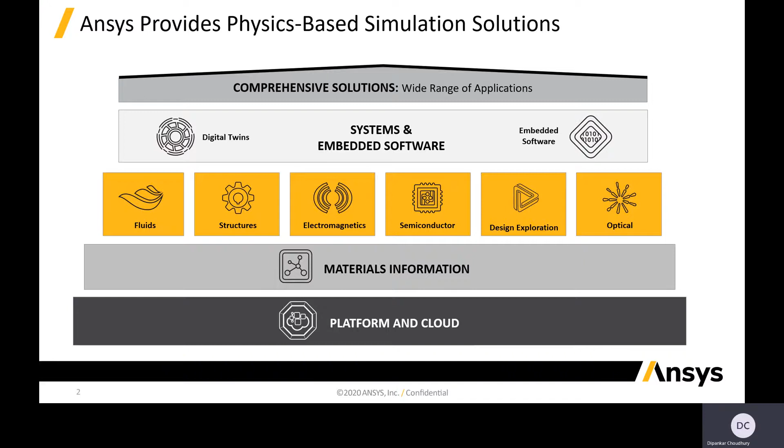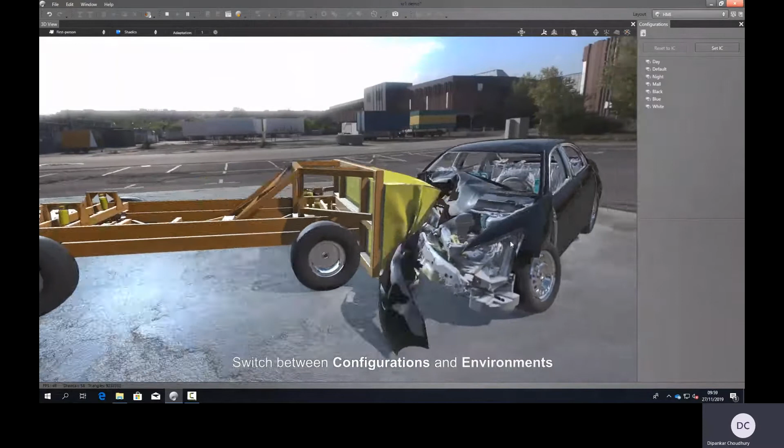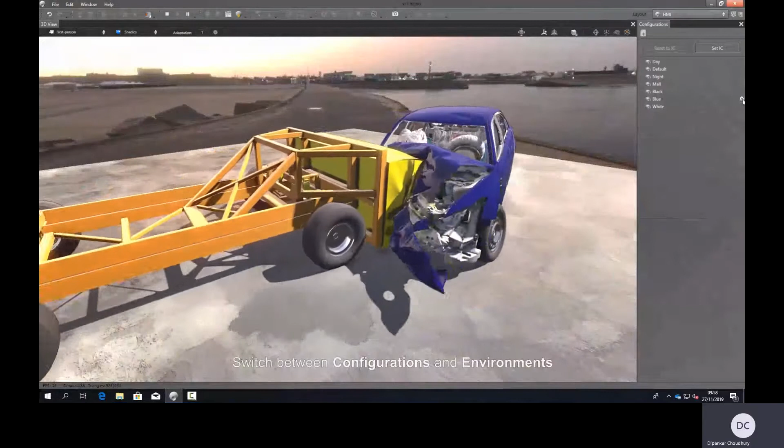An example could be seen by looking at this multiphysics simulation encompassing structural analysis, in this case impact analysis with LS-DYNA, which is a leading Ansys product for doing this type of simulation, coupled with Optis, which is optical physics modeling software that models the physics of light in a completely accurate manner, including material properties, effects of lighting, reflection, shadows, and everything. This is not just rendering from an aesthetics perspective, but physically accurate lighting calculations going on simultaneously while doing the crash analysis. This type of extremely compute-intensive calculation is not unknown to take days of computation, even on very large-scale machines.

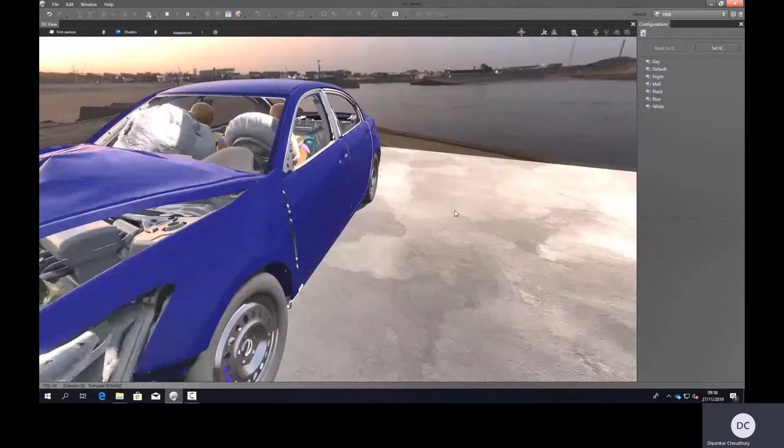So with exascale computing, we expect that these very detailed, very large-scale model sizes, and very difficult multidisciplinary physics calculations will become accessible to our customers in turnaround times that are much more useful than today.

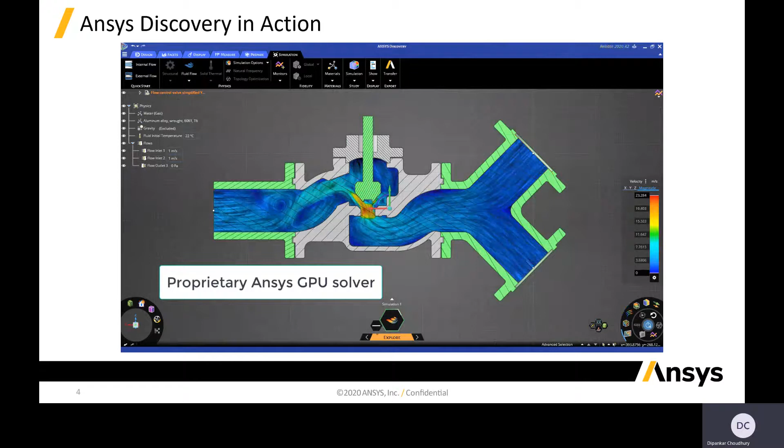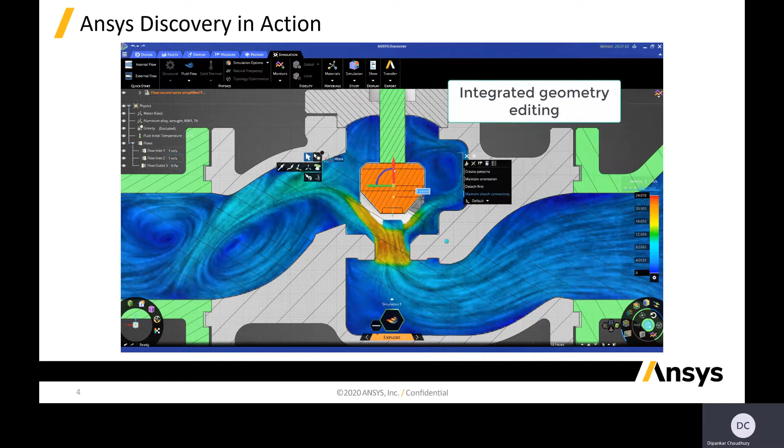The second area is for everyday designing engineers. Here we look at a completely different application called Ansys Discovery, which utilizes GPU computing in a very native manner, start to finish, from graphics, geometry building, to the calculation process and post-processing itself. Because the calculation methods are highly concurrent, utilizing GPU computing natively, we're able to turn around results very rapidly in near real time.

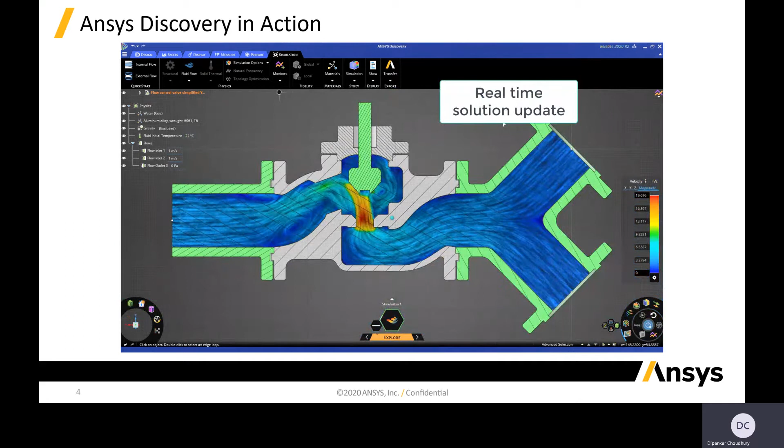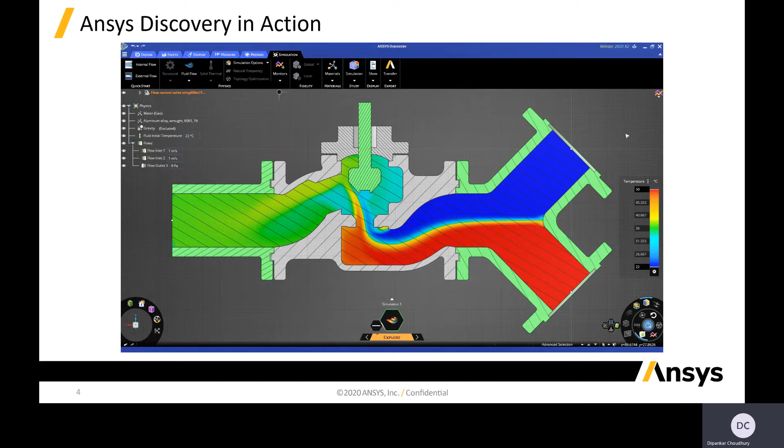Not only that, it's done such that configuration changes like geometry can be done in process, in situ, while calculations are going on. You can see that example in action through this demonstration, where the calculations respond to the geometry changes in real time.

So with this, I'd like to conclude by saying we are thrilled that the Exascale Computing Project is so strategic. It is driving innovations and advances not just on the hardware side, not just for the few exascale machines coming online in the next year or two, but also as a prime mover for advances in general HPC computing that our everyday engineer will also be able to take advantage of. It's also driving important innovations in numerical methods and algorithms that take advantage of these new architectures. This is happening in the labs, in universities, and in companies like ourselves. It's also driving the development of software tools and stacks that are so important for developers such as ourselves.

So I hope you understand that our perspective is this revolution is multifaceted, and the impact to industry is going to be huge. It's going to result in another major leap forward in the ability for simulation methods to be used as pervasively as one can imagine, in every application and at every scale. Thank you for your time.